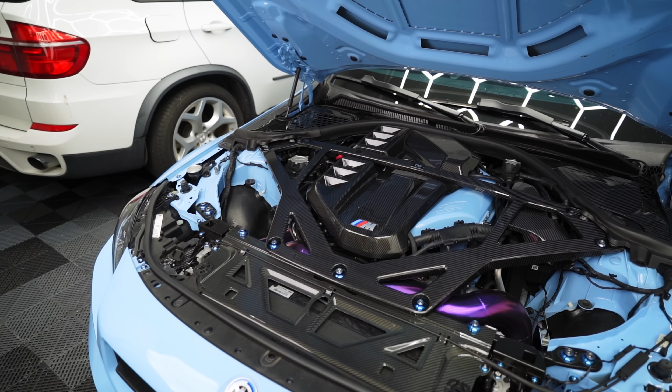Like I mentioned in a prior video, I bought the TE37s, put them on the M2, buyer's remorse immediately. I miss the VS5 RSs, especially because we're running these B-locks here, which were custom made by VFC to mimic the style of the VS5 RSs in anthracite that I used to have. So I went ahead and ordered two brand new front VS5 RSs so I can rock with the B-locks, and I'll see what I'll do with the Ts.

So here's the scoop. We're heading over to PSI to put the M2 on the dyno, not only to find out how much power it makes, but most importantly, my tuner David Shoop wants to see the dyno graph to see if we can squeeze some extra power out of this setup. So yeah, the M2 might actually end up being faster by the end of this video.

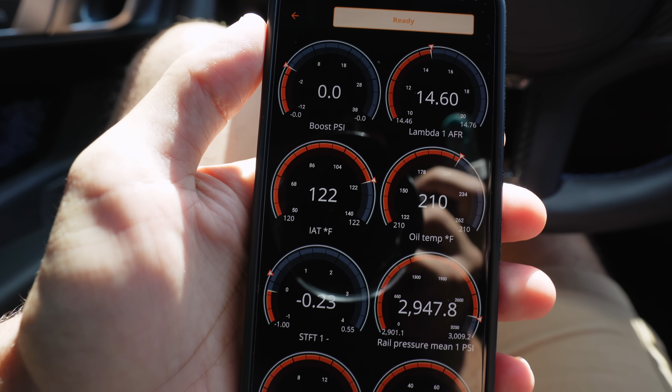Went ahead and pulled up MHD so we can take a look at some parameters. Ethanol content 78%, we're good to go on that, should be able to make max power. IATs are pretty disgusting today - that's probably gonna be the only concern, to be honest.

Fast forward a bit, we do have the M2 on the rollers. We have Alexis here from PSI that's currently strapping on the M2, and we're one step closer to finding out how much power this car makes.

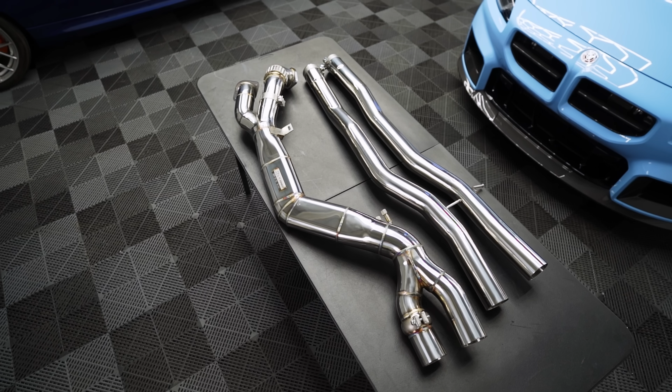For those of you guys already familiar with the channel and familiar with the G87 M2, you guys know what I'm running. Quite a bit of mods here. We do have the CSF charge cooler, running port injection with 1050cc injectors, Motive reflex, Precision Raceworks AFS setup for the low pressure. You have the CSF heat exchanger, CSF oil cooler, of course the VV front mount intakes. We are running a catback FI exhaust with a single mid pipe and also the FI 200 cell downpipes.

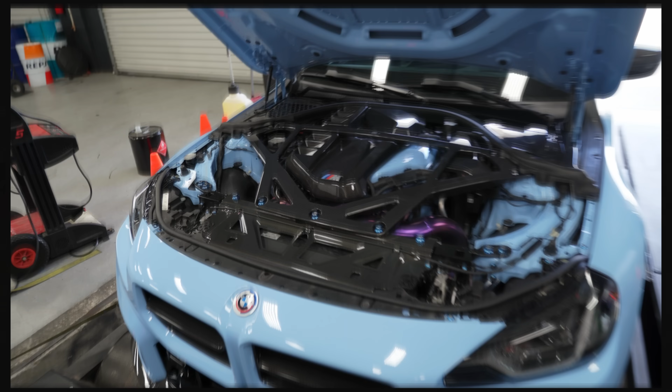The car does have a custom tune from David Shoop. It is a flex fuel setup and it's currently on an MHD platform.

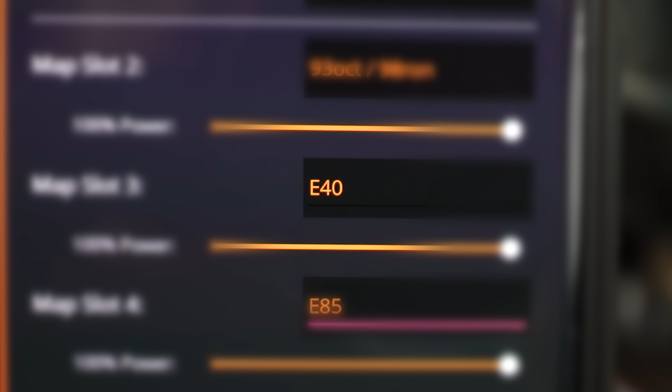Before we run the M2 on a dyno, I want to show you guys how much power the car made before. The setup at the time didn't run port injection, nor did it have a custom tune - it was running an OTS E40 MHD map.

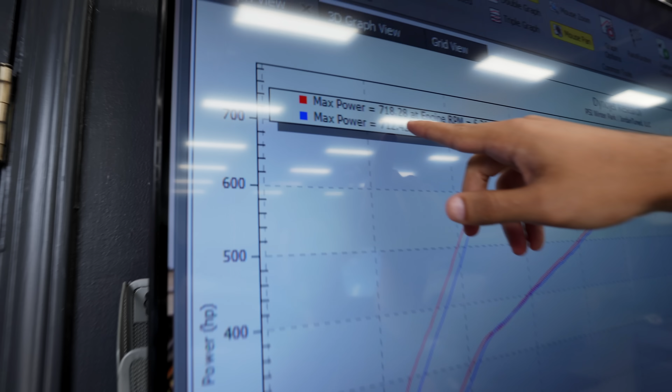Holy - 718 horsepower to the wheel, 675 pound-feet of torque, which is absolutely fucking insane.

Then we tested a 60 to 130 miles per hour: 7.25 seconds, nearly 4 seconds shaved compared to the stock 60 to 130 run.

We're gonna have a lot of fun with the M2 today.

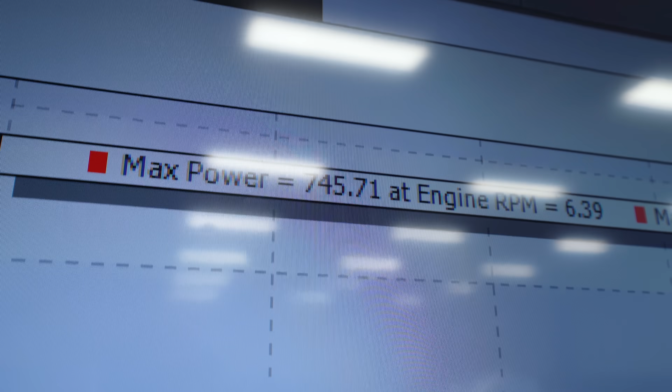There you go guys, we got the first run in the books - 745 horsepower to the wheel. Not bad for a first run. That's a lot of power for a stock turbo, stock engine setup. As far as torque, we are at 660.

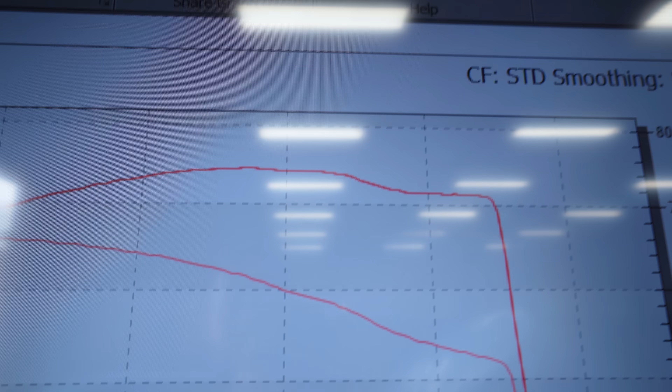And here's the dyno graph for those of you guys that are interested. It's insane to see that with just the twins, we max out power almost at redline, which is absolutely crazy.

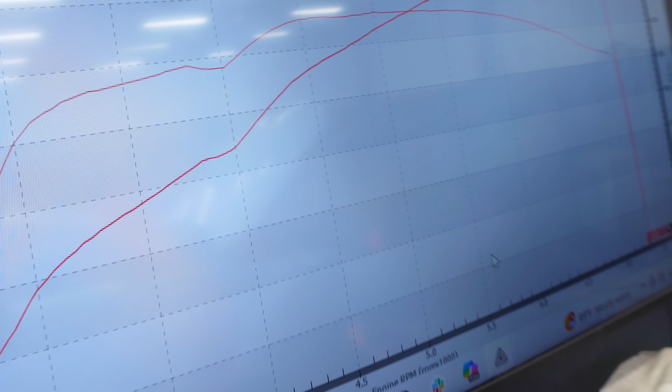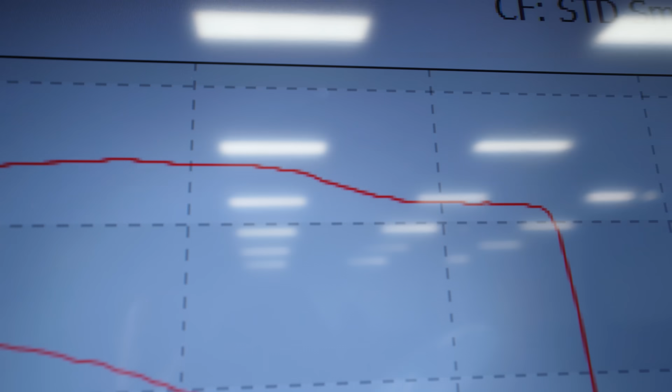Based on prior experience with my other twin turbocharged cars, they tend to run out of gas fairly quickly, and power doesn't really max out there, but maxes out somewhere in the mid-range. But it's good to see that this one makes power throughout the entire RPM range. Around 5,500 is where we peak as far as torque, with horsepower peaking just below redline at around 6,390 RPM.

So we do have a new tune map from David Shoop. I think he added a bit more timing, so we'll see how that does.

Look at that, literally 10 seconds to flash a new map. MHD is so crazy.

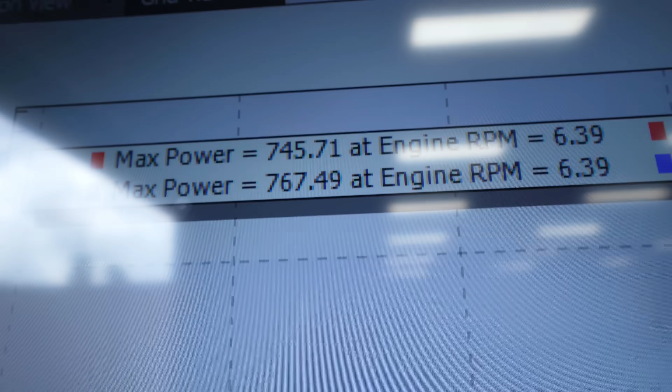All right, second run. Look at that, we picked up some power. 767 wheel horsepower, that is quite the bump. As far as torque, 688, near 700.

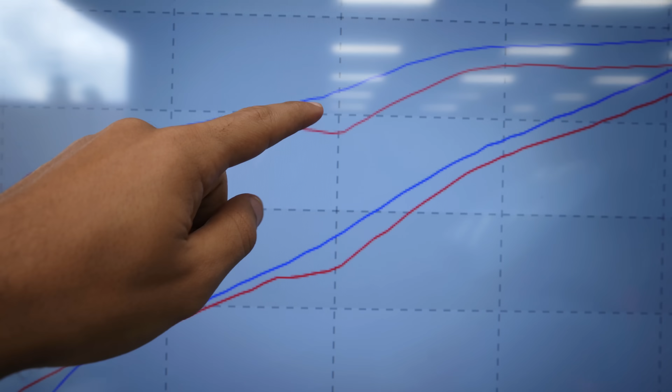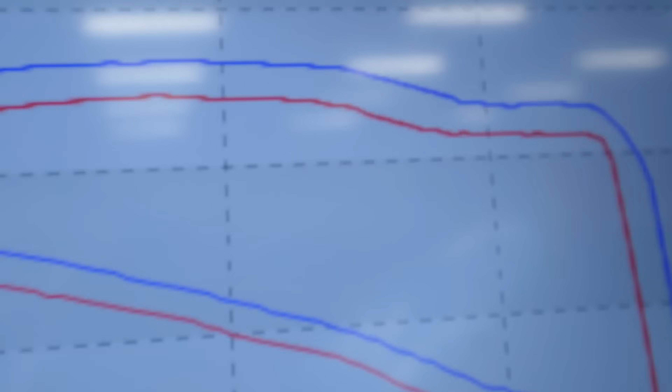I did overlay the most current graph to the old one. David was able to fix the little dip in power for both the torque and the horsepower. It's nice and smooth now, super pretty looking. Just like before, makes max HP up top, and the torque seems to peak around the same area, around 4,500 to 5,000 RPM.

So we do have another tune incoming. We're about to flash here off camera that bumps up the wastegate duty cycle by 5%. We'll see what ends up happening now.

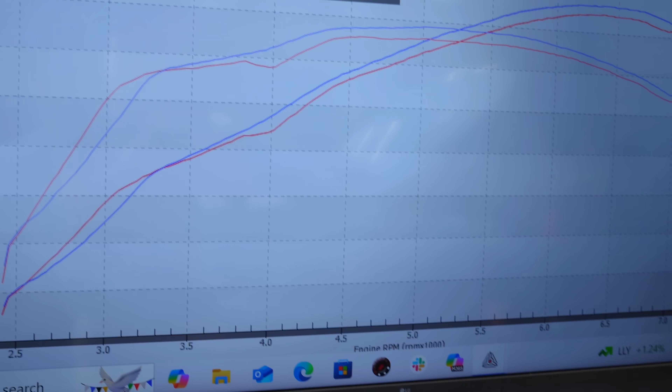Guys, that's a lot of power for stock motor, stock turbos. Man, the S58 is one hell of a fucking engine. I'm so excited.

I just took a peek at the dyno graph, guys. Oh my God. Wait till you guys see how much power it made, especially the torque. Bro, David Shoop is a mother effing man.

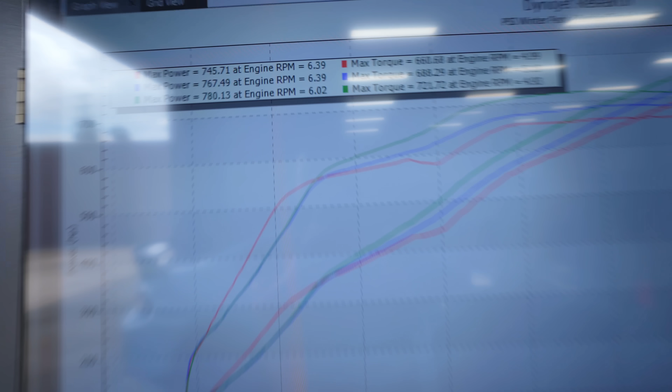All right, so this is the last run of the day, guys. 780 wheel horsepower and a whopping 721 torque, which is insane. That is the green lines you see here on the graph. As you guys can see, it picked up an immense amount of power.

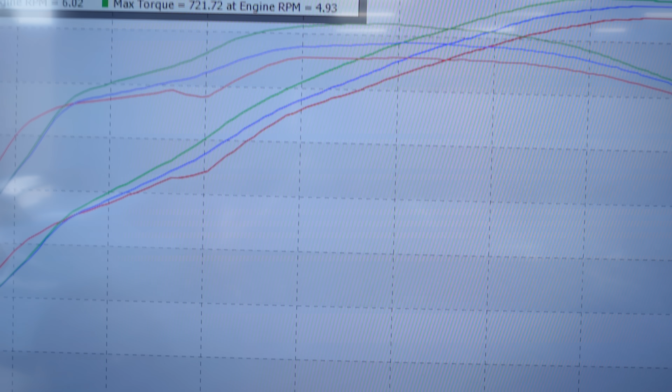So we did remove the overlays from the prior runs. Now you guys can have a better idea of what the power graph looks like here on the dyno sheet.

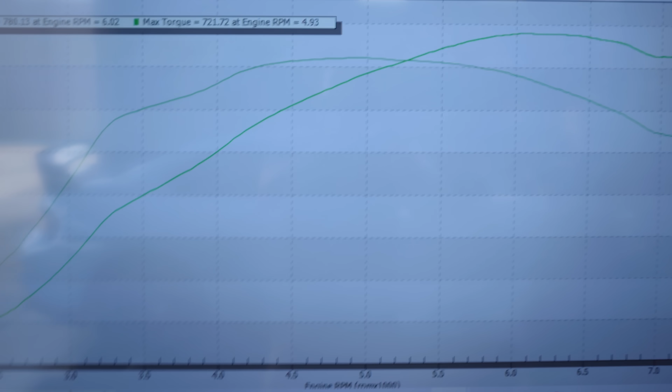Pretty impressive. You know, nowadays it's really hard to get excited about anything since we kind of do it all, but this got me really excited. I'm not gonna lie. What are your thoughts on that power?

I'm sorry, I know you didn't want to be on video, but I gotta get your opinion. No, that's exciting. Is that impressive? That's impressive. Thank you for being here and allowing me to use the dyno.

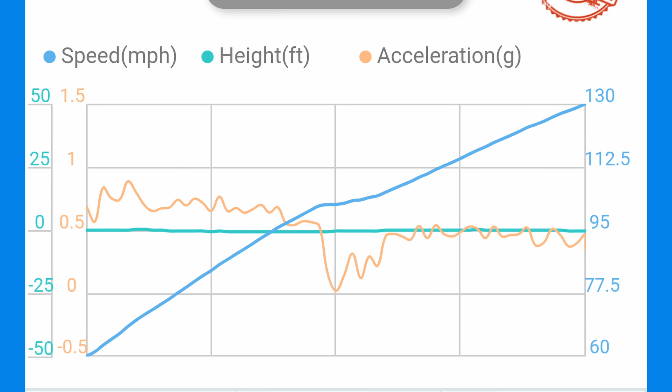Always, she's the bomb. For those of you that are curious, here's a 60 to 130 run I got a couple months ago on the 745 horsepower map. Six seconds with one gear shift. I'm sure if I ran the latest map that yielded 780 horsepower, 720 torque, the car would be much faster. And I'll probably end up testing that out in a future video when the weather cools down a bit.